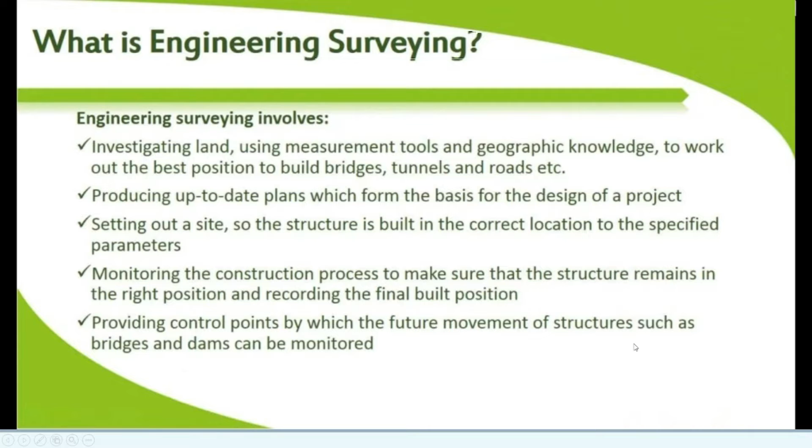Producing up-to-date plans which form the basis for the design of a project. Setting out a site so the structure is built in the correct location to the specified parameters. Monitoring the construction process to make sure the structure remains in the right position and recording the final built position. And providing control points by which the future movement of structures such as bridges and dams can be monitored.

A brief history of surveying. Number 1, surveying had its beginning in Egypt about 1400 BC. Land along the Nile River was divided for taxation. Divisions were washed away by annual floods.

Rope stretchers, Egyptian surveyors, were created to relocate the land divisions, which were based on measurements made with ropes having knots at unit distances. There was also extensive use of surveying in the building of Egyptian monuments.

For the Greeks, they expanded Egyptian work and developed geometry, and developed one of the earliest surveying instruments.

In the Middle Ages, land division of the Romans continued in Europe, wherein quadrants were a square brass frame capable of turning angles up to 90 degrees and having a graduated scale, developed by an Italian named Von Peso.

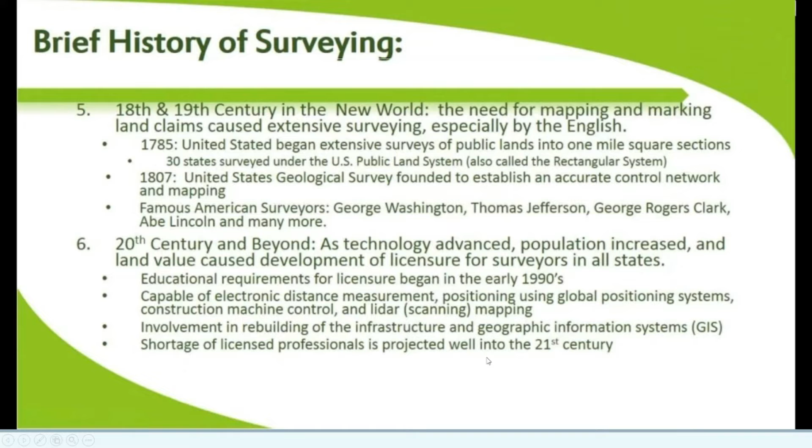Involvement in rebuilding of infrastructure and geographic information systems, or GIS, and a shortage of licensed professionals is projected well into the 21st century. So these are the brief history of surveying from the Egyptians up to the 21st century. Now, types of surveying.

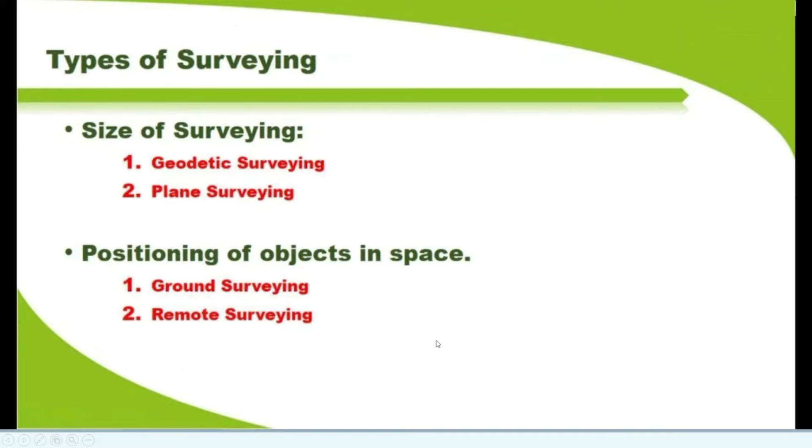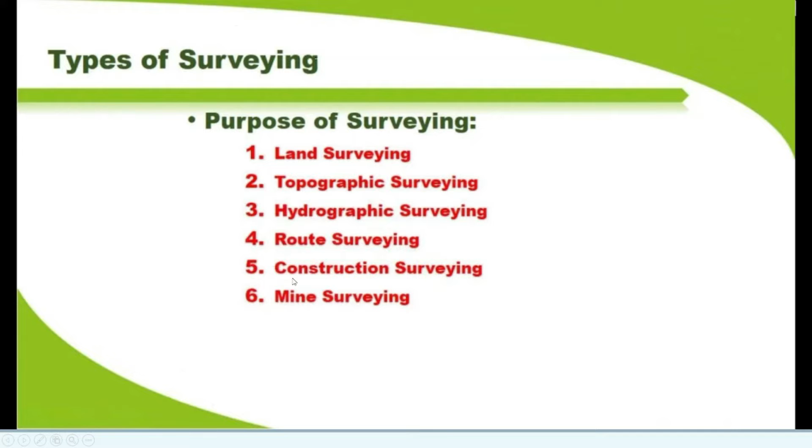For the size of surveying, we have geodetic surveying and plane surveying. For the positioning of objects in space, we have ground surveying and remote surveying. For the purpose of surveying: number 1, land surveying; number 2, topographic surveying; number 3, hydrographic surveying; number 4, route surveying; number 5, construction surveying; and 6, mine surveying.

For the categories of surveying, we have geodetic surveying and plane surveying. First, geodetic surveying: this is used when the radius of curvature of the earth is taken into account. Geodetic surveying is the surveying technique to determine relative positions of widely spaced points, lengths, and directions, which require the consideration of the size and shape of the earth.

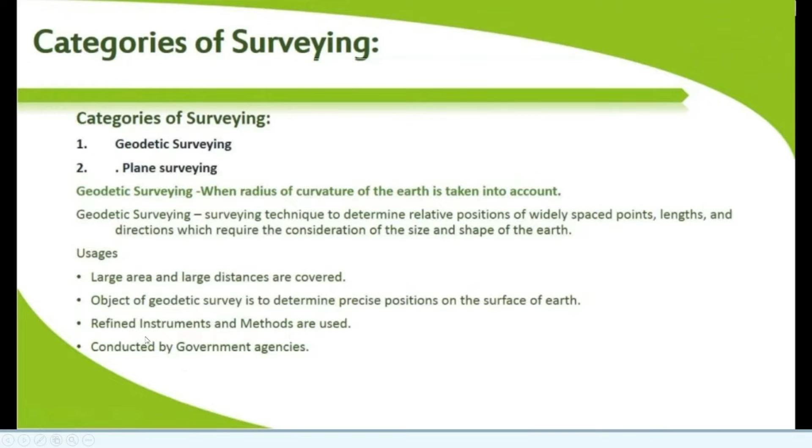For the usages, large areas and large distances are covered. The object of geodetic survey is to determine precise positions on the surface of the earth. Refined instruments and methods are used, and it is conducted by government agencies.

While for plane surveying, the radius of curvature of the earth is not taken into account. The meaning of plane surveying: surveying with the reference base for field work and computations assumed to be a flat horizontal surface.

Generally, within a 12-mile radius, the pull of gravity is very nearly parallel to that at any other point within the radius, and thus horizontal lines can be considered straight. It is for small areas and small distances covered. Degree of accuracy is comparatively low, and American Survey put 250 kilometers square for treating survey as plane, but the controlling factor should be degree of precision rather than the extent of area.

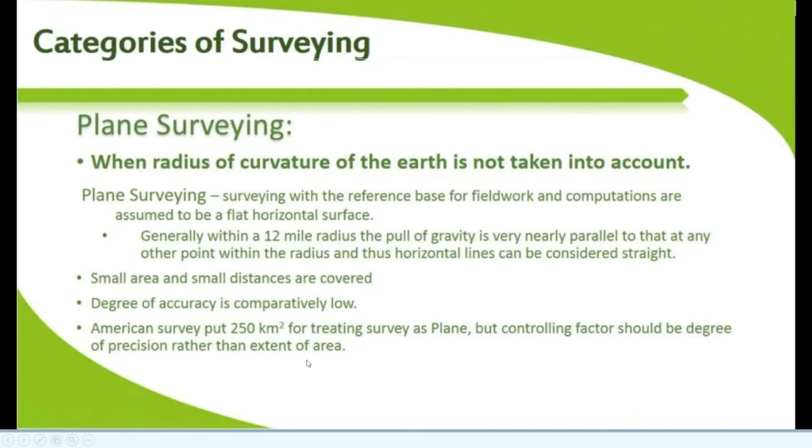For the types of surveys, we have photogrammetric, which is mapping utilizing data obtained by camera or other sensors carried in airplanes or satellites.

Number 2, boundary surveying: establishing property corners, boundaries, and areas of land parcels. Number 3, control surveying: establishing a network of horizontal and vertical monuments that serve as a reference framework for other survey projects.

Number 4, engineering surveying: providing points and elevations for building and civil engineering projects. Number 5, topographic surveying: collecting data and preparing maps showing the locations of natural and man-made features and elevations of points on the ground for multiple uses.

Number 6, route surveys: topographic and other surveys for long, narrow projects associated with civil engineering projects like highways, railroads, pipelines, and transmission lines. Last, hydrographic surveying: the mapping of shorelines and the bottom of bodies of water, also known as bathymetric surveying.

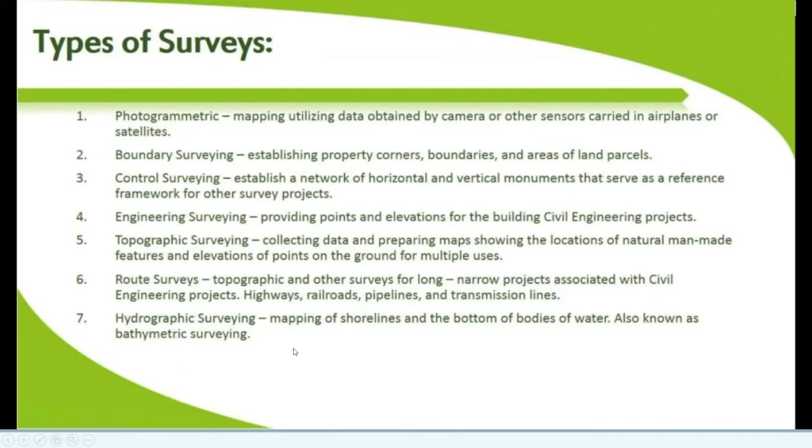Measurements and instrumentation. What is an instrument? There are two kinds of instruments used in plane surveying: number 1, linear, and number 2, angular. For linear, we have horizontal distance and vertical distance, while for angular, we have horizontal angle and vertical angle.

In surveying, all measurements are horizontal, can be inclined, reduced to horizontal, and vertical components in plotting. The distance between two points on a plan or map is always horizontal distance, irrespective of their elevation—the distance between their projection on the horizontal plane.

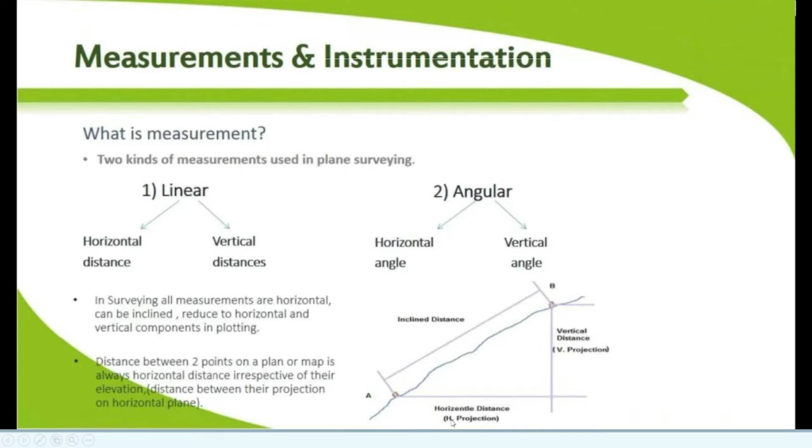Measurement of distance: we have the horizontal distance, the distance between two points in the horizontal plane, and the vertical distance, the distance between two points in the vertical plane.

For the horizontal angle, a horizontal angle is the angle formed in a horizontal plane by two intersecting horizontal lines, while the vertical angle is formed by two intersecting lines in a vertical plane, one of which is horizontal.

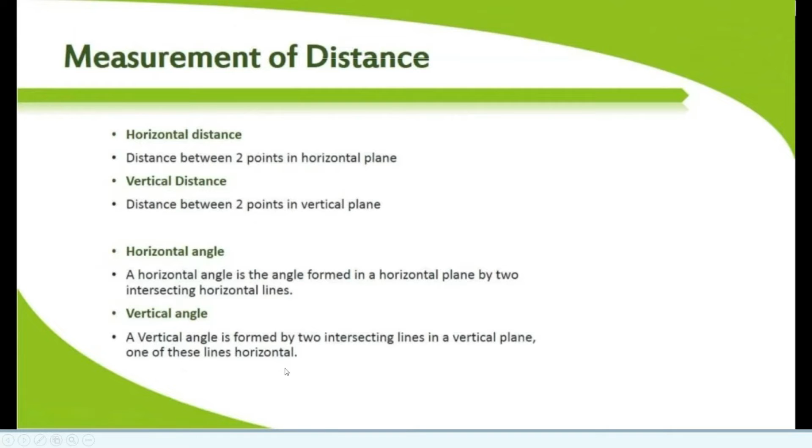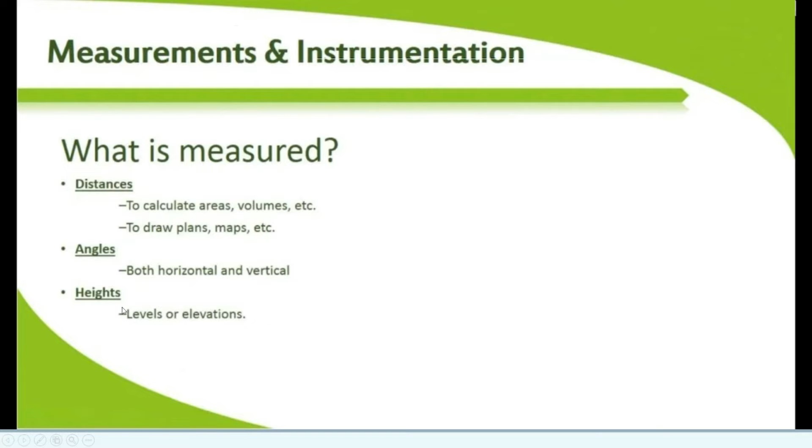What is measured? For distances, to calculate areas, volumes, and others, and also to draw plans, maps, and others. For angles, it is both horizontal and vertical. And for heights, we have the levels or elevations.

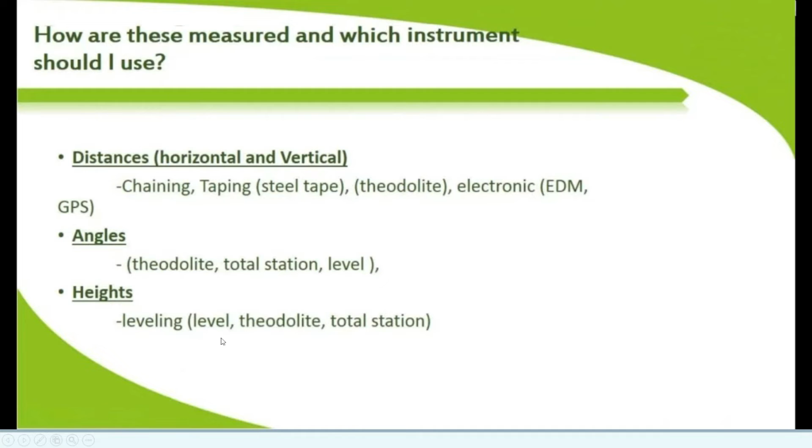How are these measured and which instrument should I use? For distances, based on horizontal and vertical, the instruments are chaining, taping or steel tape, theodolite, and electronic EDM or GPS. For angles, it is theodolite, total station, and level. For heights, it is leveling or level, theodolite, and total station.

Instruments for measuring distances: we have two main methods for linear measurements. A, direct method, which is by chain, tape, or other instruments directly. And the other method, indirect method, based on computation—distance is obtained by calculation.

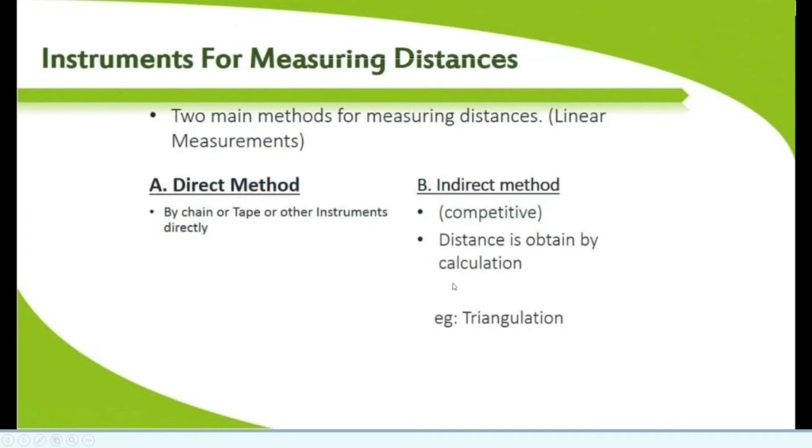Direct measurement: several methods or instruments are available. Number 1, based on pacing. Number 2, passometer. Number 3, pedometer. Number 4, odometer. Number 5, speedometer. Number 6, perambulator. Number 7, judging distance. Number 8, time measurement. Number 9, chaining. These are the methods and instruments available to be used.

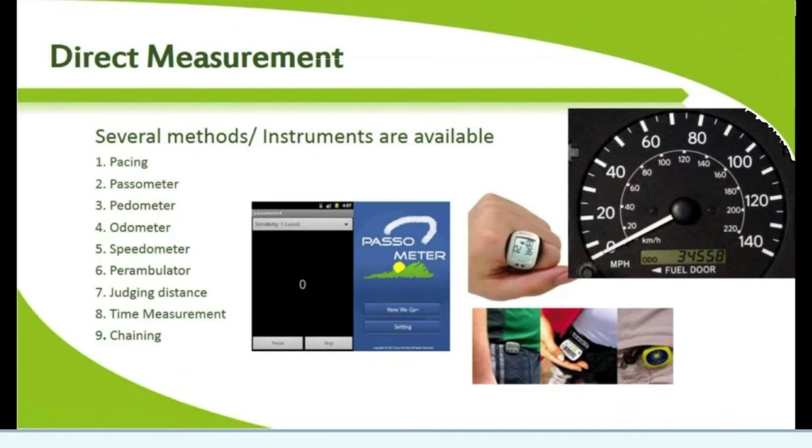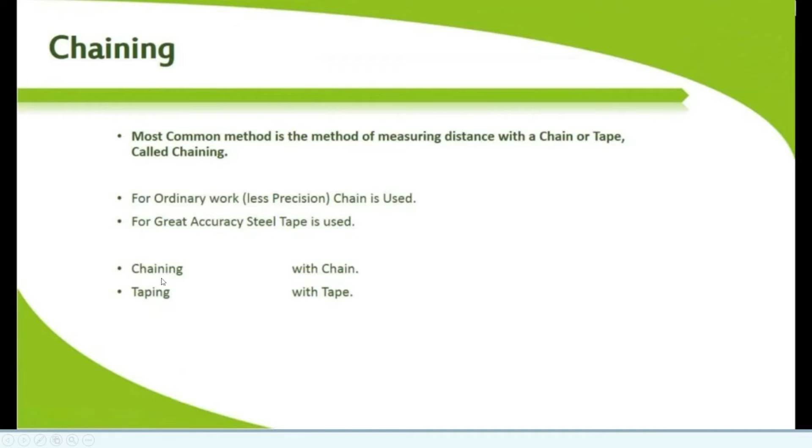For chaining, the most common method is measuring distance with a chain or tape, called chaining. For ordinary work or less precision, chain is used, and for great accuracy, steel tape is used. For chaining, we have chain, and for taping, we have tape.

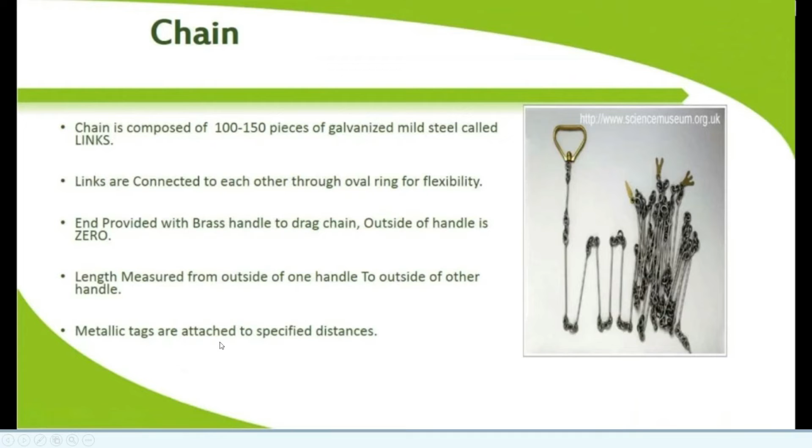A chain is composed of 100 to 150 pieces of galvanized mild steel called links. Links are connected to each other through oval rings for flexibility and provided with a brass handle to drag the chain. The outside of the handle is zero, and length is measured from the outside of one handle to the outside of the other handle. Metallic tags are attached at specified distances.

Different types of chain. The following are the various types of chain in common use: number 1, metric chains; number 2, steel band or band chain; number 3, gunter's chain or surveyor's chain; number 4, engineer's chain; and number 5, revenue chain.

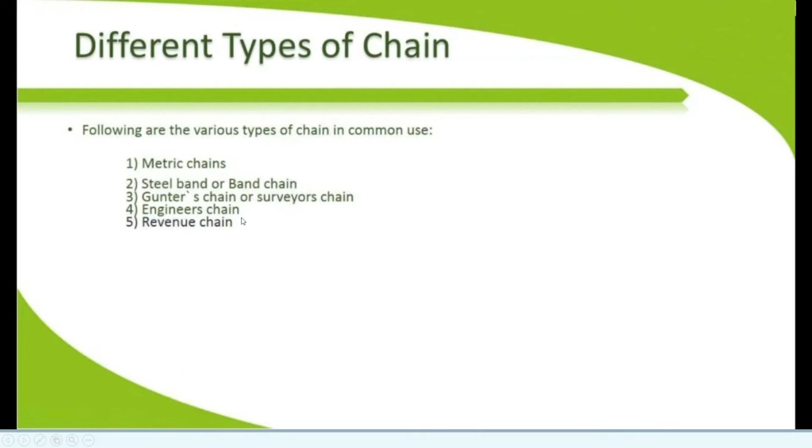What is a metric chain? Metric chains are made in lengths of 20 meters and 30 meters. Tallies are fixed at every 5 meter length, and brass rings are provided at every meter length except where tallies are attached.

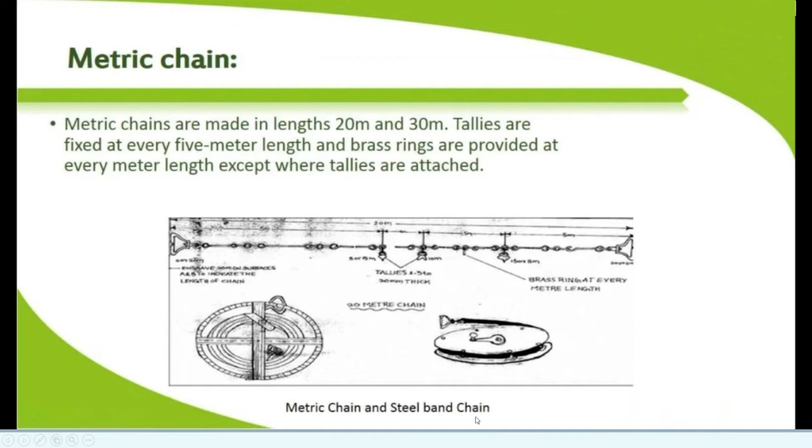So this is the example of a metric chain and steel band chain. And for Gunter's chains, the length is 66 feet or 22 yards. Number of links is 100. Each link is equal to 0.66 feet and used for measuring distances in miles or furlongs, or 220 yards.

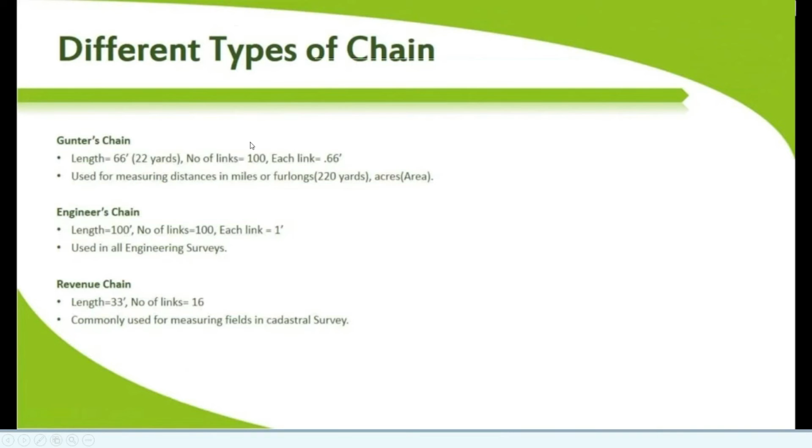Or acres or area. And for the engineer's chains, the length is 100 feet, number of links is 100, and each link is equal to 1 foot, used in all engineering surveys. And for the revenue chain, the length is 33 feet, number of links is 16, commonly used for measuring fields in cadastral survey. So these are the different types of chains: metric chains, Gunter's chain, engineer's chain, and revenue chain.

Errors in length due to incorrect chain. The most common errors are that the chain may be too long or too short. It will be corrected by using the formula: the length of a line is equal to L prime over L, times measured distance, where L prime is the incorrect length of chain, while L is the correct length of chain.

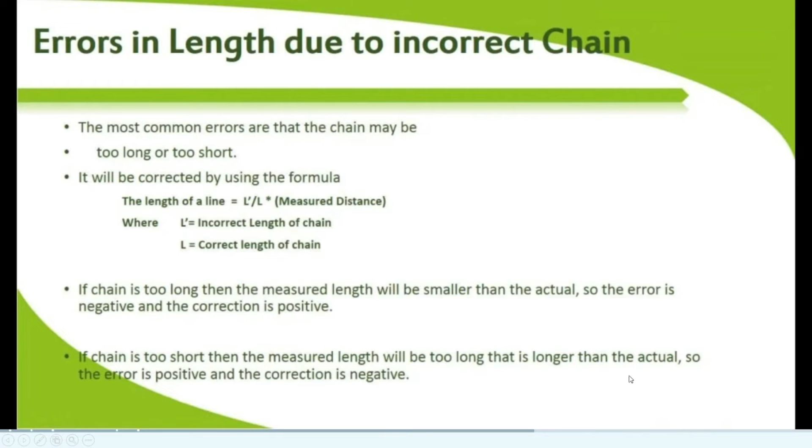If chain is too long, then the measured length will be smaller than the actual, so the error is negative and the correction is positive. If chain is too short, then the measured length will be too long, that is longer than the actual, so the error is positive and the correction is negative.

Example: the length of a line measured with the help of a 20-meter chain was found to be 634.4 meters. It was found afterwards that the chain was 0.05 meter too long. Find the true length of the chain. So we have the solution.

True length of line is equal to L prime over L times measured length. L prime is equal to the exact length of the chain, which is 20 meter, plus the additional length, which is 0.05, which is longer by 0.05. So 20 plus 0.05, L prime is equal to 20.05 meter, and the exact length of chain is 20 meter. So the measured length is equal to the given, which is 634.4 meters.

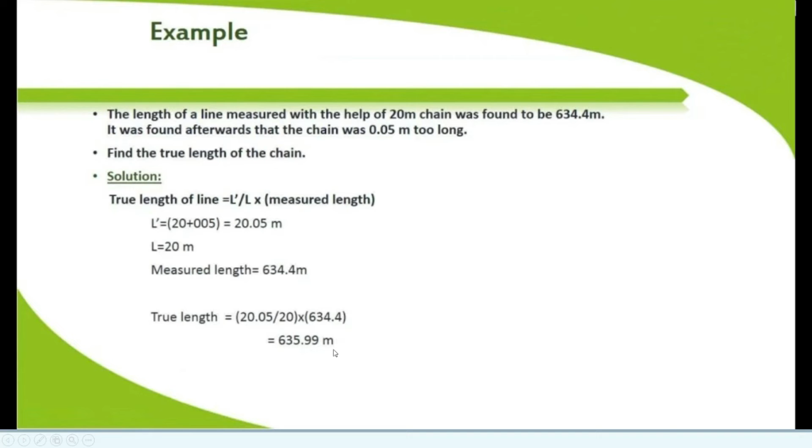So true length is equal to 20.05, which is the L prime, over L, which is 20, multiplied by the measured length, which is 634.4, and the value of the true length is 635.99 meters.

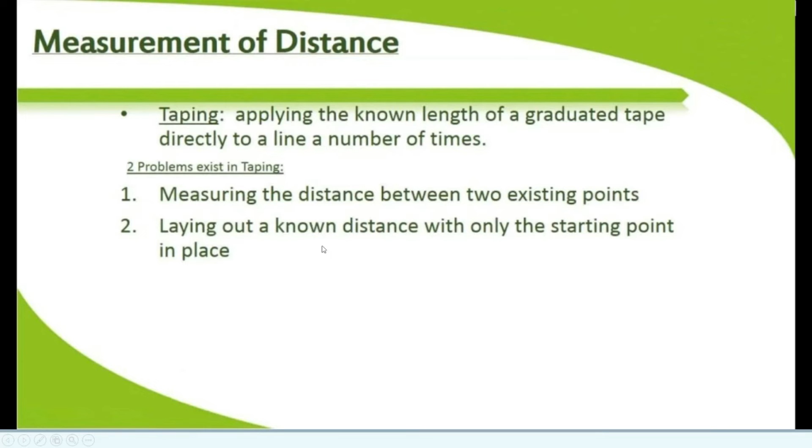Measurement of distance. For taping, applying the known length of a graduated tape directly to a line a number of times. We have two problems that exist in taping: number one, measuring the distance between two existing points; and laying out a known distance with only the starting point in place. And we have 6 steps of taping.

Number one, lining in: shortest distance between 2 points is a straight line. Number two, applying tension: rear chainman is anchor and the head chainman applies required tension. Number three, plumbing: horizontal distance requires tape to be horizontal. Number four, marking tape lengths: each application of the tape requires marking using chaining pins to obtain total length.

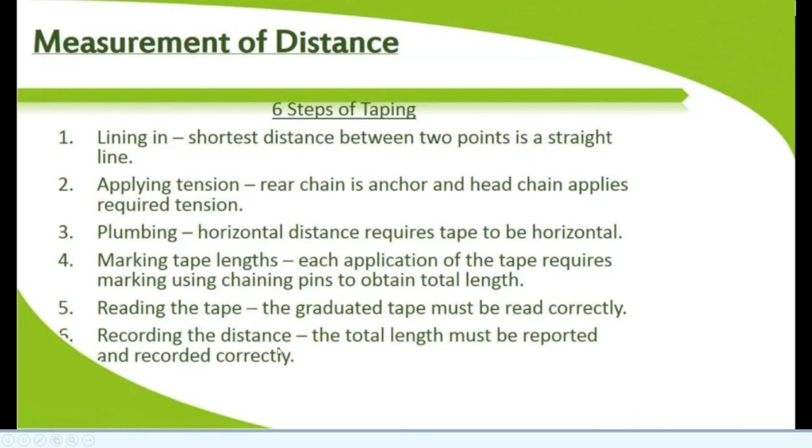Number five, reading the tape: the graduated tape must be read correctly. And number six, recording the distance: the total length must be reported and recorded correctly.

And for the types of chains and tapes: invar tapes, which are made of special nickel steel to reduce length variations due to temperature changes. The tapes are extremely brittle and expensive, and used most of the time for standard comparison of tapes. Next, we have cloth, fiberglass, and PVC tapes: lower accuracy and stored on reels, used for measurements of 0.1 feet accuracy requirements.

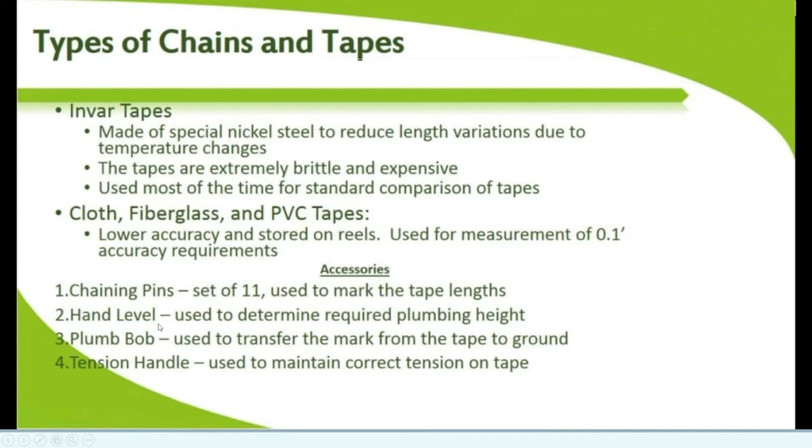And for the accessories: chaining pins, set of 11, used to mark the tape lengths. Hand level, used to determine required plumbing height. Plumb bob, used to transfer the mark from the tape to ground. And tension handle, used to maintain correct tension on tape. So these are the additional accessories for chains.

For field process, number one, the line to be taped should be marked at both ends. Keep measurement on line. Rear chain person should keep the head chain person on line, and 1 foot of line error over 100 feet is equal to 0.01 feet of error in length.

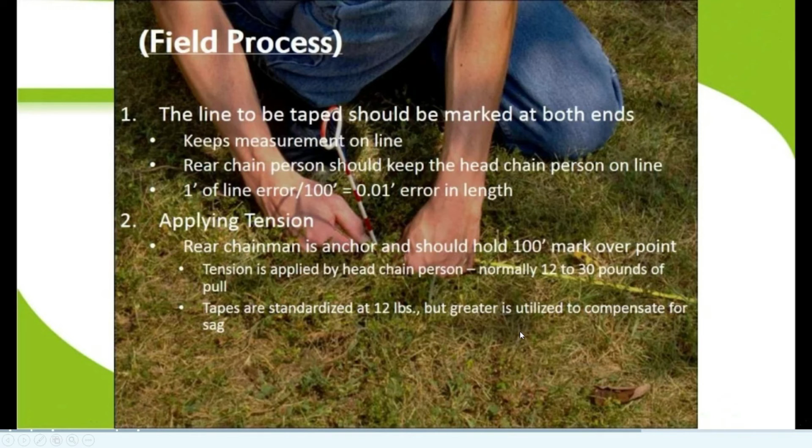Number two, applying tension. Rear chainman is anchor and should hold the 100 feet mark over point, wherein tension is applied by head chain person, normally 12 to 30 pounds of pull. Tapes are standardized at 12 pounds, but greater pull is utilized to compensate for sag.

For plumbing, one end of the tape is raised to maintain a horizontal measuring plane. Only one end is elevated. This allows measurements to be made on uneven ground. If a high spot exists in the center, break tape by measuring to the top and then move forward to complete the distance.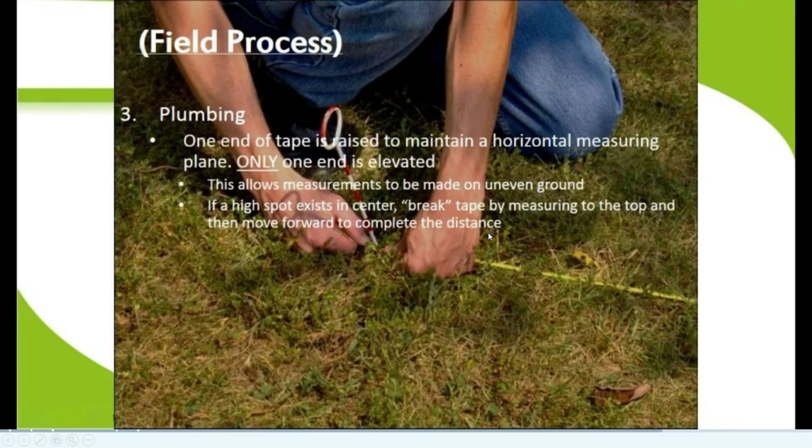For slope measurements, generally measurements are made horizontally, but on even, often man-made slopes, the distance can be measured directly on the slope, but the vertical or zenith angle must be obtained. The vertical distance is equal to sine zenith angle times slope distance. The horizontal distance is cosine vertical angle times slope distance. So this is the formula based on slope measurements.

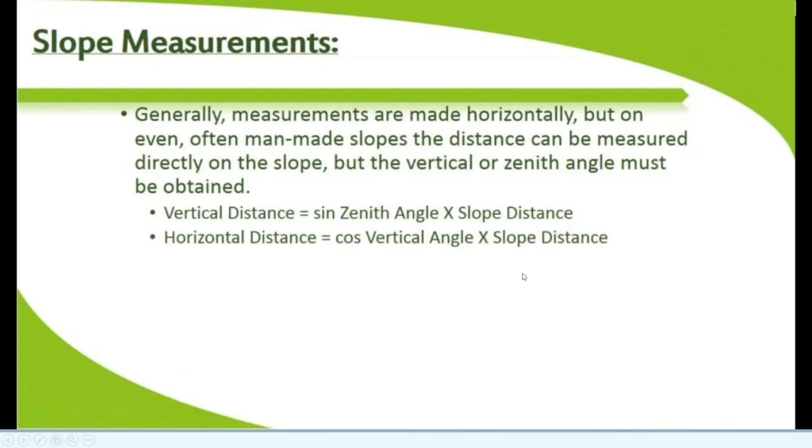For units of measurement, we have length. For the English system, this is inch, foot, yard. For the metric system, we have centimeter, meter, and kilometer. The conversion: 1 foot is equal to 12 inches, 1 yard is equal to 3 feet, 1 mile is equal to 5,280 feet, 1 inch is equal to 2.54 centimeters, and 1 foot is equal to 30.48 centimeters, or equivalently 0.3048 meters.

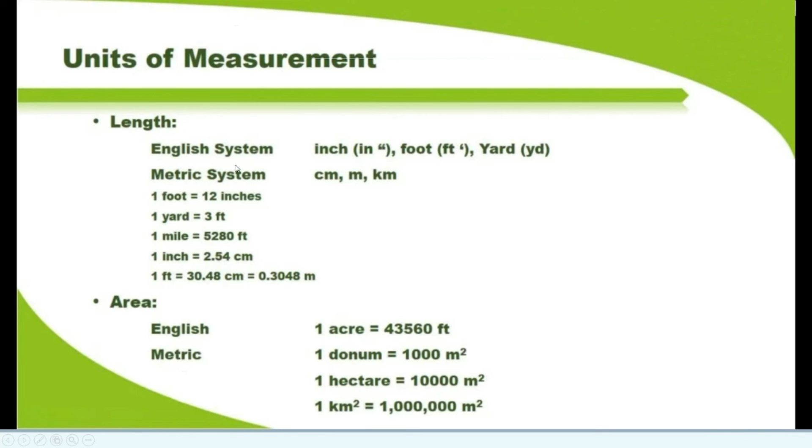For area, in the English system, 1 acre is equal to 43,560 square feet. For the metric system, 1 donum is equal to 1,000 square meters, 1 hectare is equal to 10,000 square meters, and 1 kilometer square is equal to 1 million square meters. So these are the basic measurement units based on English and metric systems, on length and area.

For angles, we have the sexagesimal system, wherein a circle is divided into 360 degrees. Each degree is divided into 60 minutes, and each minute is divided into 60 seconds. For example, we have 213 degrees, 24 minutes, and 47 seconds.

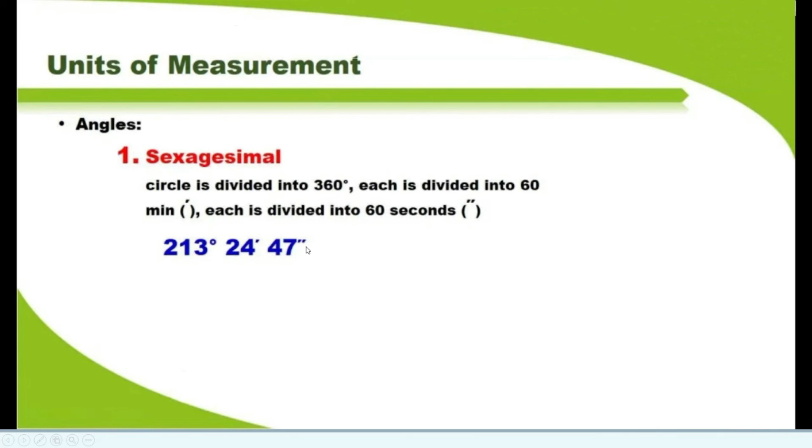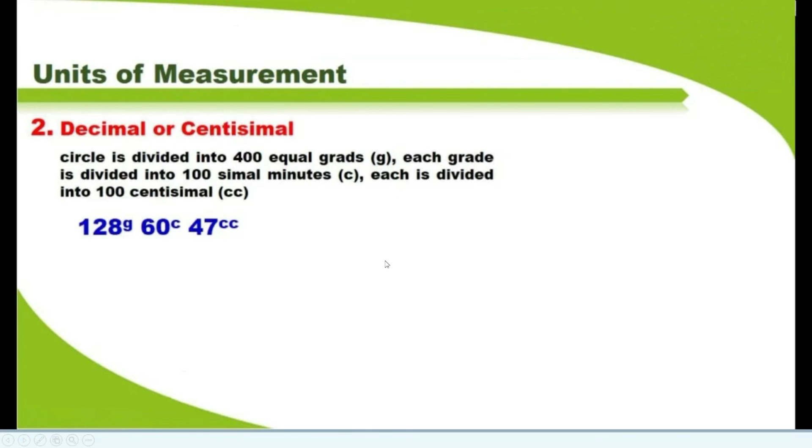For the decimal or centesimal system, a circle is divided into 400 equal grades, or G. Each grade is divided into 100 simal minutes, or C, and each is divided into 100 centesimal, or CC. So we have 128 grades, 60 simal minutes, and 47 centesimal. This is the decimal or centesimal measurement.

For the radian system, the radian is defined as the central angle opposite to a circular arc whose length is equal to its radius. The whole circle has an opposing angle of 2 pi, or 360 degrees.

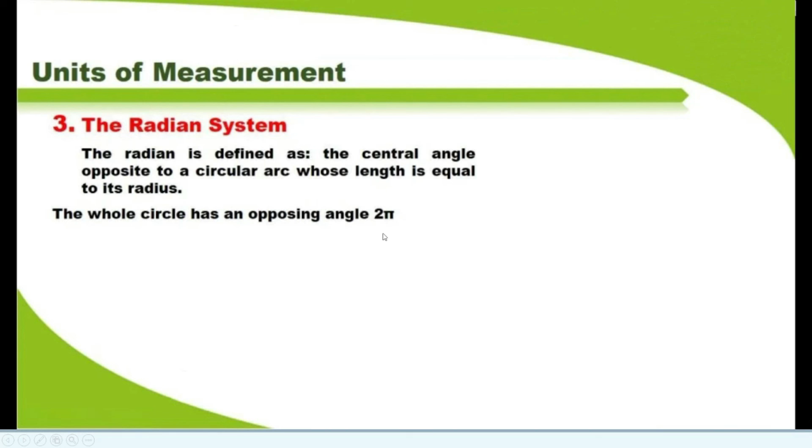Problem: convert the angle 213 degrees, 24 minutes, and 47 seconds into decimal and radian systems. Solution: the angle can be written as 213 degrees plus 24 over 60 minutes plus 47 seconds over 3600 seconds, which is equal to 213.4131 degrees.

To convert it into decimal system: 213.4131 degrees over 360 degrees, multiplied by 400 grades, is equal to 237.1256 grades. In terms of centesimal, 237.1256 grades is equal to 237 grades, 12 simal minutes, and 56 centesimal.

To convert it into the radian system, based on degrees: 213.4131 degrees over 360 degrees, multiplied by 2 pi, is equal to 3.7247 radians.

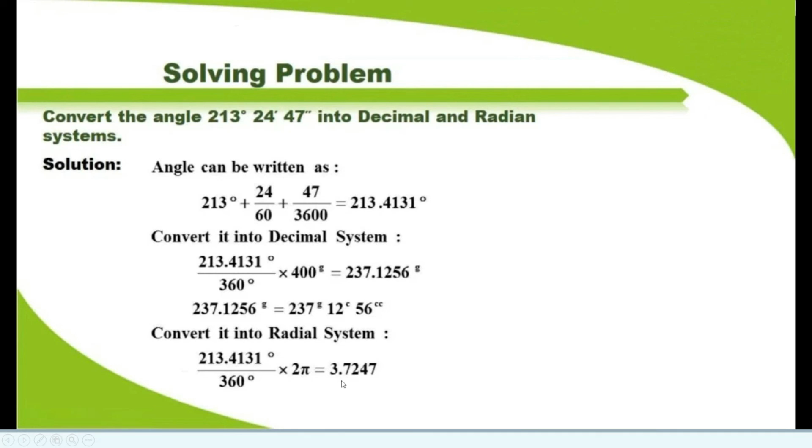Next problem: convert the angle 115 grades, 2 simal minutes, and 14 centesimal into the sexagesimal system. Solution: the angle can be written as 115 plus 2 over 100 plus 14 over 10,000, which is equal to 115.0214 grades.

Convert it into sexagesimal system: 115.0214 grades over 400 grades times 360 degrees—always multiply by 360 degrees—is equal to...

103.5193 degrees. Remove the whole number, and the remaining decimal, 0.5193 degree, is converted into minutes by multiplying by 60 minutes. So 0.5193 multiplied by 60 minutes is equal to 31.1556, or 31 minutes.

Remove the whole number, which is 31, and the remaining decimal, 0.1556 minutes, is converted into seconds by multiplying by 60 seconds. So 0.1556 times 60 seconds is equal to 9.336 seconds.